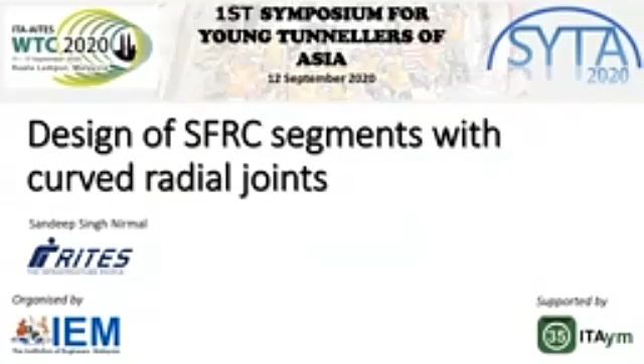Greetings to everyone who have joined from Asia and all my friends who have joined from outside Asia as well. I am Sandeep Singh Nirmal. I am working with RITES Limited.

I will be discussing one of the designs that is very close to my heart, which is design of steel fiber reinforced concrete segments with curved radial joint. This design is very special to me, and I'll be carrying what I've learned through this journey of designing this project throughout my life. The reason why it is special is because when I was doing this design, I had very limited guidance and very limited mentorship, but I was able to figure it out myself from scratch, and I've learned a lot. I will definitely be taking the positives and negatives that I've learned from it throughout my life to make my designs even better.

Today, I'm very delighted to be presenting this design on this platform. Being one of the co-founders, I can imagine the excitement that we all have today to have a regional platform at Asia level to discuss and share the tunneling experiences that we are going through.

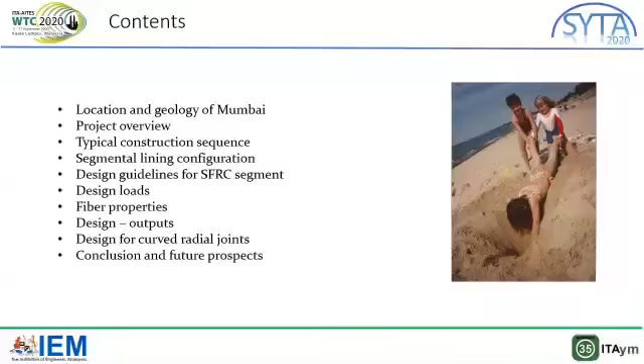As you can see, Mumbai is located on the west coast of India by the Arabian Sea, and I am sure nearly all of us would have heard of Mumbai. It has a very huge history, and it is the financial capital of India.

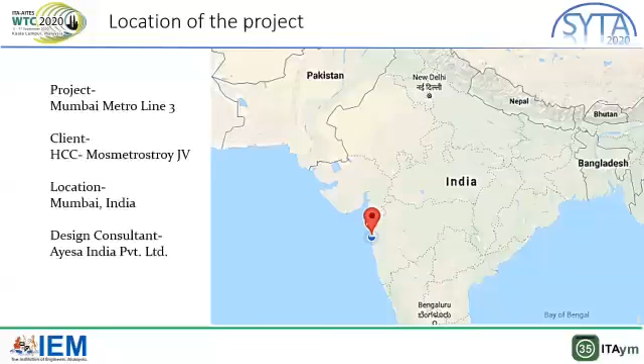The contractor for this project is HCC in JV with Mosmetrostroy, and the design consultant for this project was Ayesa India Private Limited, for which I was employed at that moment when I did the design.

Then we find intact basalt or breccia at around 10 to 15 meters of depth. Weathered breccia is a fragmented rock mass in a soil-like matrix, and when water starts to flow through it, it behaves like soil. So you can imagine that when we are tunneling through the mixed geology, we are in locations where we have intact basalt, and we go into weathered breccia with high water levels, which behaves like soft ground.

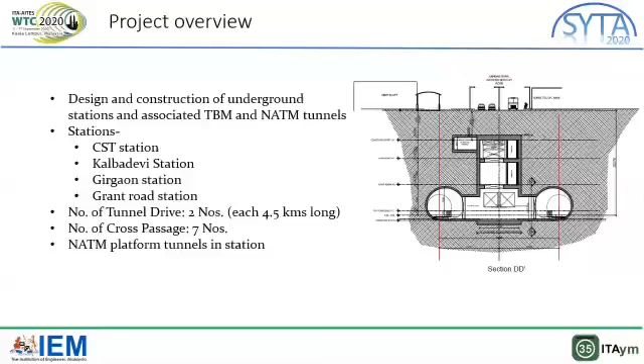At the moment the project is under construction, so we can see that they are being widened to make space for platform tunnels.

You can see the project area - this is one of the 7 packages involved in this project. We were in package 2. On the south, we begin with CST station from where the TBMs were launched, and all the way to the north, they travel up to Grant Road station.

The stations at Kalbadevi, Girgaon, and Grant Road were built with a combination of cut and cover and NATM technology. So this project included nearly all types of tunneling that we study.

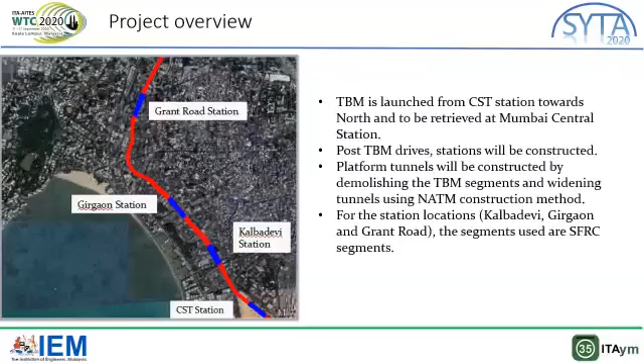TBMs used were open face hard rock TBMs, and recently in the last few months, both TBMs have had breakthrough through the Grant Road station.

The typical construction sequence we followed is to go through with TBM tunnels first, then we widen the tunnels to make them platform tunnels. Sometimes we widen them to have staircases into them as well.

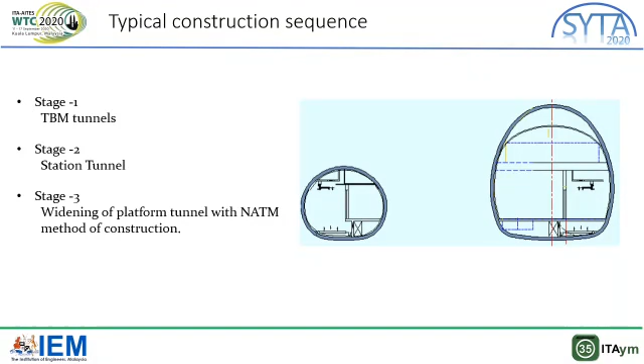Coming to the segmental lining configuration, the internal diameter of the TBM tunnels is 5.8 meters, and the thickness of the lining is... making the outer diameter 6.35 meters. The configuration has five regular segments and one key segment. I apologize, the thickness of the lining is 275 millimeters.

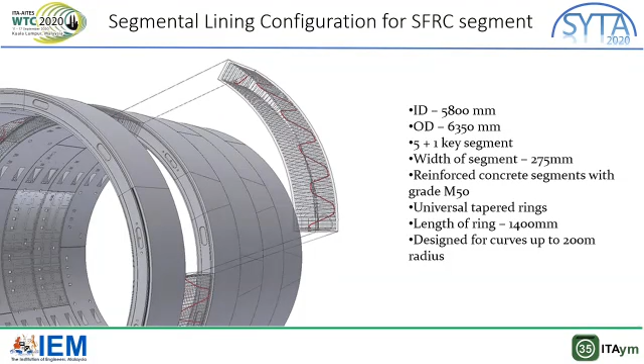The width of the segment is 275 millimeters, with reinforced concrete segments of grade M50 concrete. The rings are universally tapered, making them easy to maneuver, and the length of each ring is 1.4 meters. This configuration is designed for curves up to 200 meters of radius.

Coming to the design loads, we considered the soil or rock overburden, ground loads that were present due to the buildings, and the water loads because the water level was quite high, the location being close to the sea.

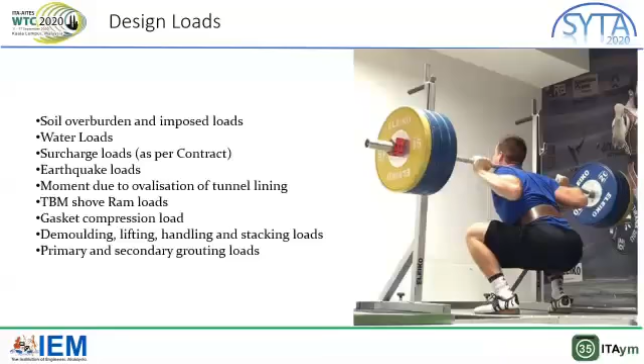Then earthquake loads - although Mumbai is not very earthquake prone, it still lies in zone 2, for which we had to consider the additional stresses. Then we have moments due to ovalization of tunnel lining, ram loads, gasket loads, gasket compression loads, and demolding, lifting, handling, and stacking loads, along with the primary and secondary grouting loads that we expect.

Steel fibers that we used were of 80 by 60 configuration, and the Thames Tideway Tunnel project was used as a reference to see if the same fibers can fit the requirement of the project, and apparently they were found to be quite appropriate.

So we suggested that we should go for the same configuration, do the beam test to find out the crack flexural capacity of the beams and the segment, and then go ahead with the design.

Fiber tensile strength was 1100 MPa. We decided that a feed of 30 kg per meter cube should be sufficient for this project.

Characteristic residual flexural strength for 0.5 millimeter crack by the loading was found to be 3.5 MPa, and for 2.5 millimeter crack was found to be 2.3 MPa. Residual tensile strength was found to be 0.77 MPa.

And the concrete that we used was M50, or we can say it was C40 as per the Eurocode standards.

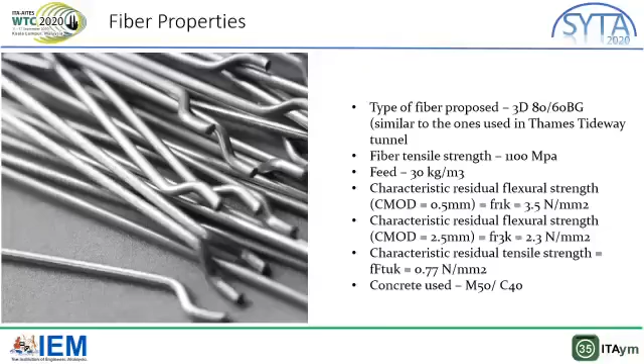So for it to work, we have to crack it first, and see during testing that after 0.5 mil crack and 2.5 mil crack, what flexural capacity it has. Then we use those flexural capacities to create a curve with the deflection, and from that find out how much energy it can take and dissipate, and how much load it can bear.

We did the FEM analysis to find out the load and stresses onto the tunnel lining. For each of the stations, we chose the appropriate section, which was the most critical section, and found the stresses that we were expecting into the lining. We were expecting huge forces because of high water levels, and moments were high only where the strata was not very good. Otherwise moments were quite low for the intact strata.

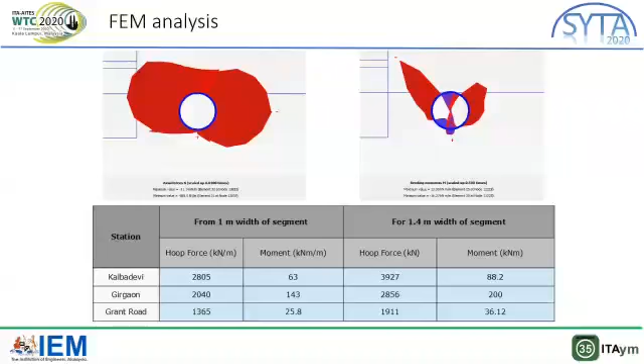Then we did a load moment diagram, generated for the specific fiber reinforced concrete segment, and these capacities were found by the beam test that we did to find the cracked flexural capacity of the segments. So you can see that two stations were very comfortably inside the graph and quite safe.

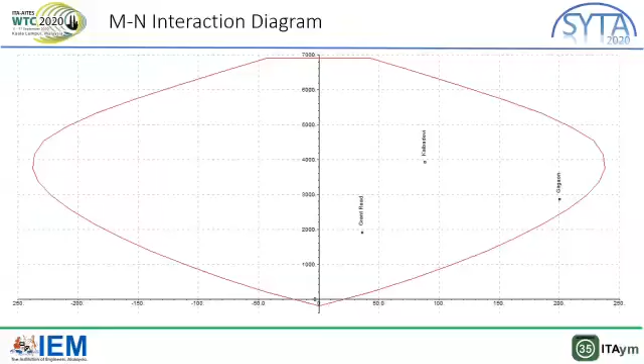Girgaon station was theoretically safe, but it was quite close to the capacity of the matrix. This construction is going on, and we have found that this configuration does work for the project as we expected.

Now coming on to the specifics of designing the curved radial joint. This is one of the configurations of our segment. You can see that the segments are jointed to each other with grooves in between for allowing it to ovalize, and a groove to put a segment gasket for waterproofing.

We can see that the radius of this radial joint is about 2000 millimeters. This is the effective width for the segment, and all the hoop force that will be coming onto the lining will be transferred to this particular width, creating huge bursting force here.

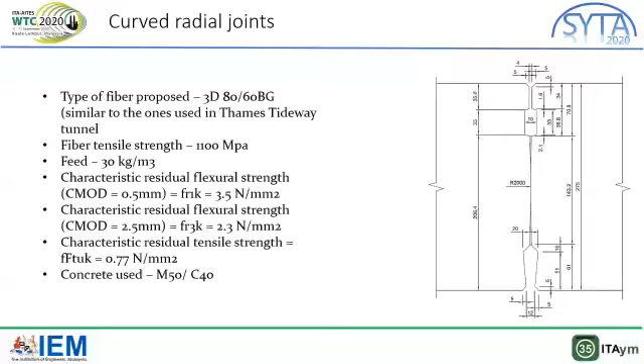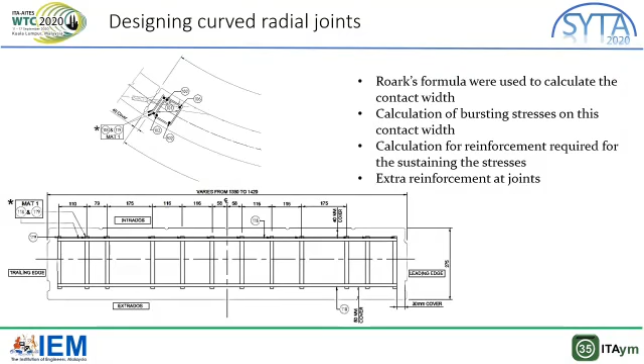We have to check that this joint is safe for the bursting stresses. That's why we sometimes have to provide the end reinforcements, or the ladder reinforcement towards the bursting joint, to find out whether the stresses are within the capacity of the concrete to sustain or not, and on the other hand, to find out how much additional reinforcement we require. We used an approach from Roark, and a calculation for bursting on this crack contact width was done, then the calculation for reinforcement which was required was found out.

Apologies for not very good pictures, but I guess it is still a little bit readable. This is basically the abstract from the Roark approach. It is assumed that one segment is trying to transfer the hoop force to another segment like a pre-stressed block. This will push the segment down, resulting in bursting forces which will try to crack the concrete.

We know that concrete is considered to not have the tensile capacity to take tensile stresses. Hence, we have to provide additional reinforcement to cater for those stresses. As a design guideline, as per ITA, the steel fiber reinforced concrete is considered to only improve the flexural strength of the concrete, but not the compressive or tensile stresses.

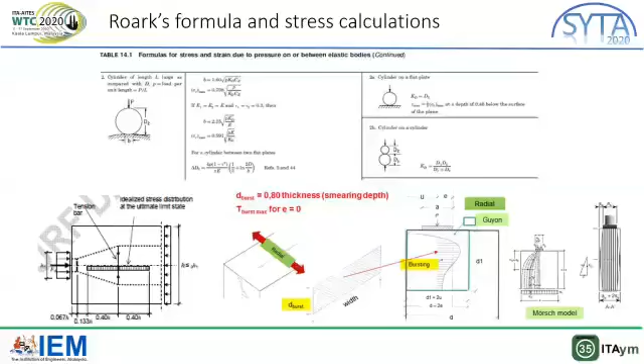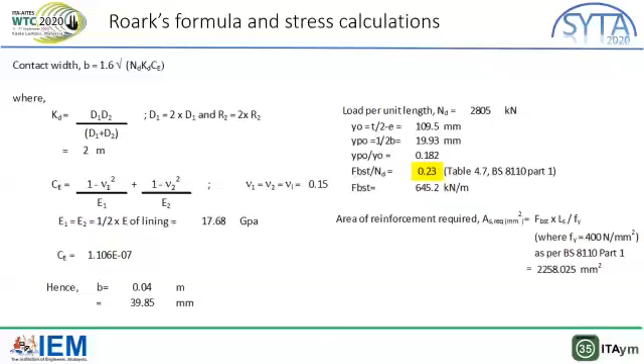So there is theoretically no benefit of putting steel fibers for bursting stresses. We calculated the bursting stresses using Roark's approach, and all these numbers and formulas are from Eurocodes as well as the Roark approach to find out the bursting stresses. Based on these stresses, we found out the area of reinforcement required at this location.

I would like to conclude by saying that what I've learned is that we have to combine three different approaches to come to the conclusion: ITA guidelines for design of reinforced concrete segments, Roark's approach, and Eurocodes, to actually find out the solution for this challenge. We may work a little bit to create a comprehensive guideline to design steel fiber reinforced concrete segments.

There is certainly some improvement in concrete in terms of tensile and compressive stresses due to putting steel fibers into it. So there is further scope of finding out how much they contribute to the strength of the concrete in that sense, and to find how much of that capacity we can utilize to reduce the amount of reinforcement required for tensile and bursting forces. Thank you very much.